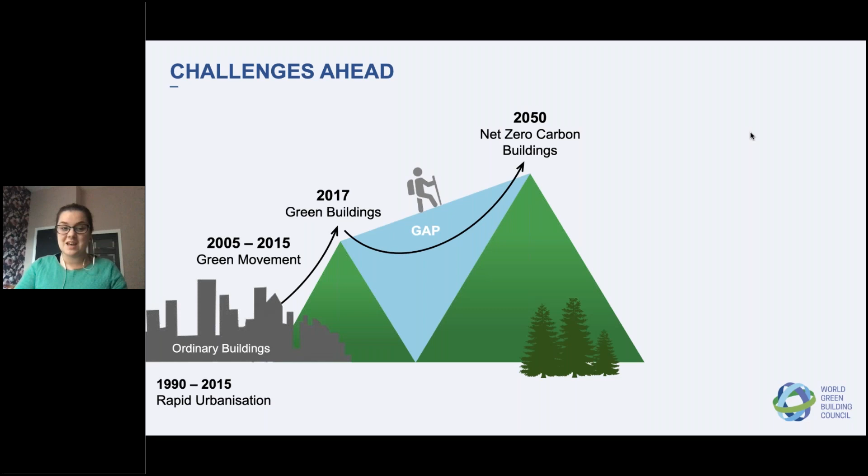But the reality is that in order to achieve our climate reduction targets, we must reach net zero carbon buildings by 2050. The gap between the definitions of green buildings that are a little bit better than typical buildings meeting code, and the very high performance net zero carbon buildings we're talking about, is very large. So it's important that we understand how this can be achieved, and that we can leap over that gap from ordinary buildings into net zero carbon buildings.

And looking ahead, we need to be thinking about creating regenerative and resilient cities and healthy communities that support a responsible and healthy way of life and well-being.

The Advancing Net Zero project was created by the World Green Building Council as a global campaign to accelerate the uptake of net zero carbon buildings to 100% by 2050. We want to do that by increasing awareness and education of the urgency and achievability of net zero carbon buildings, achieving alignment and commonality between the different approaches and certification schemes that green building councils have around the world, and finally expediting uptake in global markets by sharing market leadership examples through events and forums such as the one we're having here today.

We at World Green Building Council have set a whole life carbon vision that says by 2050, buildings need to be addressing both net zero operational carbon and also the embodied carbon associated with the materials and construction that go into their building and renovation over the future, and that by 2050 both of those impacts need to be zero.

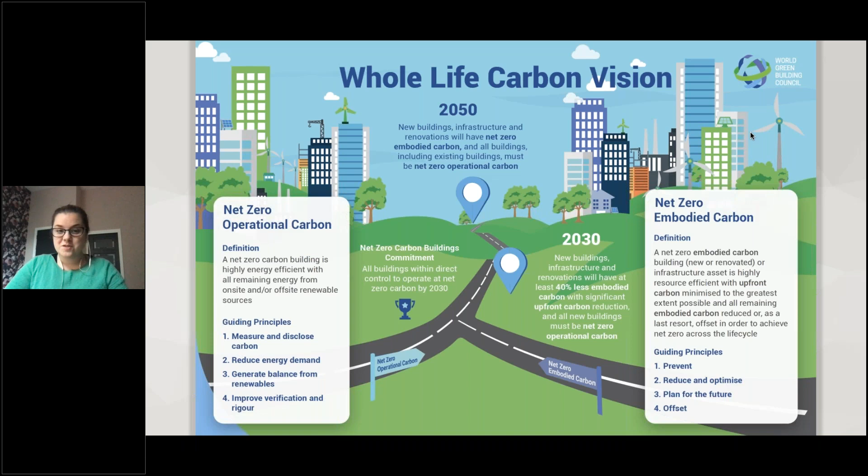Through this vision, we've created a framework to help us get there that sets a definition and guiding principles for both net zero operational carbon and achieving net zero embodied carbon, and we have some interim targets for 2030 to help us accelerate that transition.

But the main thing we need to be communicating is that when we talk about net zero carbon buildings, we first of all mean the way they operate, the way they perform. That means they need to be highly energy efficient, with all of their energy demand met by 100% renewable energy. And as we transition into a whole life perspective, those buildings also need to be very considerate of where the materials are coming from, and the carbon impacts of those materials from production all the way through the building's life cycle.

To run through some definitions on what we mean by net zero: first we take the baseline of the building, the energy consumption expected to be used by the building, and therefore how many carbon emissions it will be responsible for during its operation based on how that energy is generated.

Through energy efficiency measures, we can reduce the energy demand, and that building will be more energy efficient than if it was built to local code requirements - for example, bringing in measures like improved glazing, or maximizing the use of natural ventilation and lighting to reduce the power needs of the building.

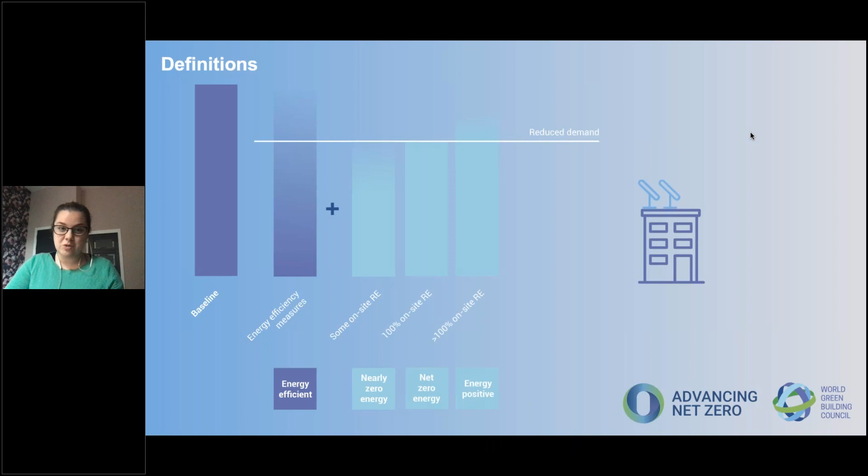That might mean the building is energy efficient, but in order to bring it into the net zero carbon categories, it then needs to meet its energy demand with renewable energy. If you're able to produce some renewable energy on site to meet nearly all of that reduced demand, that building could be nearly net zero energy or net zero ready - prepared for a grid that is decarbonized in future. Where a building has met all of its needs with renewable energy on site, that's called net zero energy.

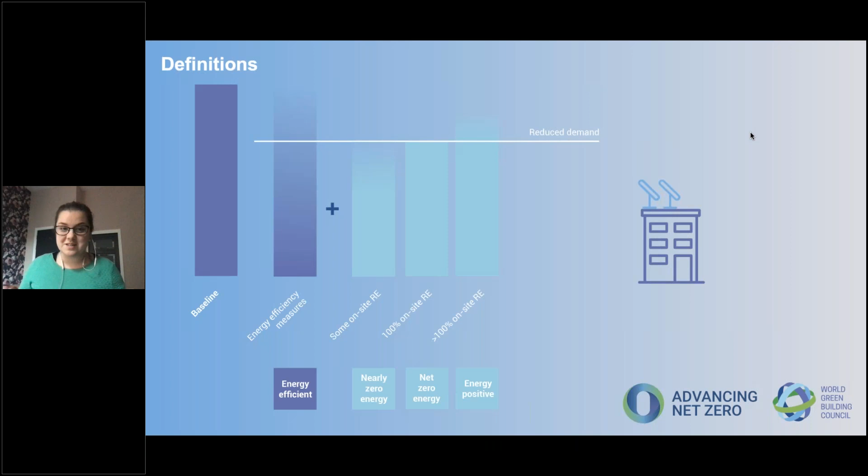And where it generates more energy than it needs to operate, and therefore shares that energy back to the grid, or even with buildings around it, that's an energy positive building.

But for us, we feel that in order to achieve our net zero targets, we need to be focusing on net zero carbon, because not every building will be able to meet its energy demand on site with solar panels on its building. So it's important for us to consider where renewable energy can be generated off-site and then bought and brought into the building, so outside of the building's boundary itself.

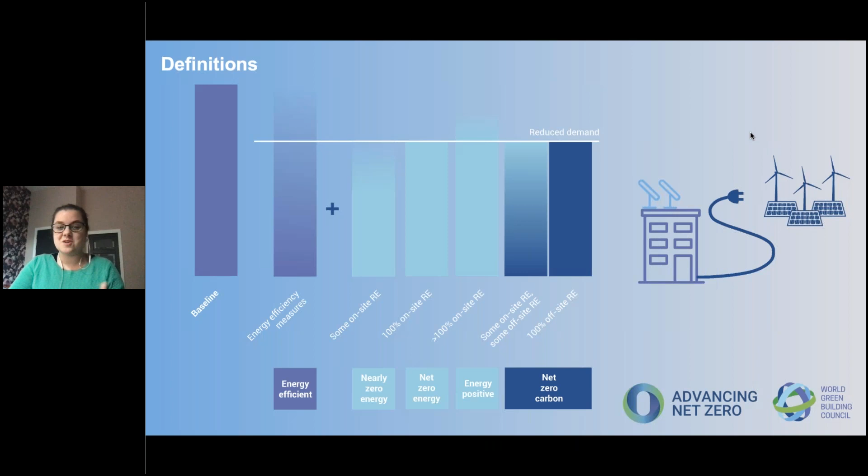And where that's not possible, we also recognize the role of carbon offsets in order to balance the carbon necessary to operate that building. And so that's what we mean by net zero carbon buildings.

Our green building councils in our network around the world have been busy creating tools and resources and programs to help promote how to achieve net zero within their particular markets. And there's lots of different names and terminologies based on how a market is responding to the challenges of net zero, and whether they might be including other impact areas within that program, whether they might have different restrictions on the way that you can procure renewable energy, for example, but very much based on the local context and what is appropriate.

They may all be called different things, but they all follow the framework that I set out earlier with those key principles. And so it means that there is alignment within what they mean by net zero. And in this case, zero really does mean zero.

In terms of the value proposition for net zero carbon buildings, whether you are a policymaker, an investor, an owner-occupier, a developer, or a tenant, there will be a compelling reason for you to take on and embrace net zero buildings as part of your portfolio.

Whether that's sending positive signals to the market or back to policymakers about the readiness to embrace net zero buildings, whether you're ensuring that your assets are fit for the future and they are Paris proof, so they are prepared and future proofed against future impacts of climate change, and whether it means that you're creating enhanced internal environments for your occupants, or whether it's ensuring that you're taking opportunities through your core business activities to demonstrate climate leadership.

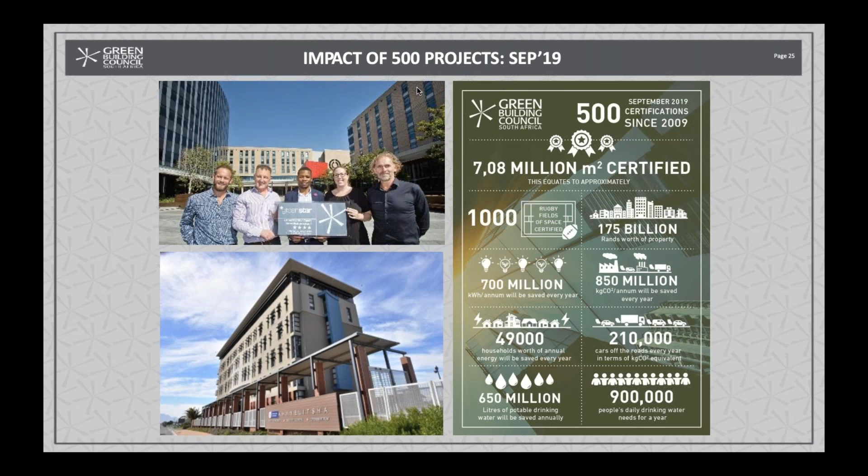So we've certified over 540 buildings actually to date. This was our 500 milestone that we reached at last year's convention, demonstrating the tangible impact that green buildings have on either energy or water savings. Thanks. Next slide.

Our certifications are informed by a whole range of different tools, primarily looking at either new build, when you're looking at the intention and the design of a building, and also looking at existing buildings. But obviously, what's really exciting and what has really captivated the market of late is net zero. And the GBCSA, as we mentioned, we came up with our own certification tool, but I'm also going to touch on EDGE, which we use to certify residential developments in South Africa. EDGE has been developed by the IFC, which also now, since 2020, has a zero carbon option. Thanks. Next slide.

So, our net zero scheme. I thought I'd share some of the interesting things that potentially make it slightly different.

We can apply it to carbon, and we've actually extended it also to water, waste, and ecology. I think we're one of the only GBCs that has extended it all the way to ecology. And we also look at both a modeled or a measured option, and this is quite interesting. A lot of net zero schemes only look at measured options for existing buildings, so that's when you would focus on consumption data, for example, over 12 months.

We felt that it was important because of our market and our context to offer options to projects along every stage within a building's life cycle to consider net zero ideas. We wouldn't want buildings to get to the stage where they are existing and then they retrospectively need to retrofit because net zero design principles were not thought of at the design stage. You can pursue net zero on its own, for example, if your project wants to go off the grid, or if you are pursuing it in parallel with another certification.

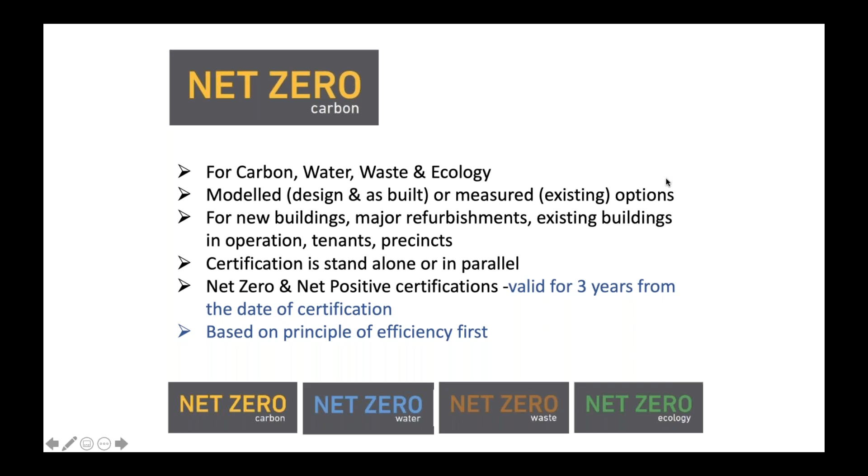I think you've got to skip. Okay, and the next slide, please.

Okay, great. And another interesting thing about our net zero carbon and all of our net zero ratings is that we introduced different levels, and this recognizes the different stages within a product's carbon life cycle. So the first stage, level 1, if you don't mind pressing a few times because it's going to come up in different little stages. Yeah. Level 1 looks at the base building. So this really just looks at non-tenant energy uses, so all the fixed services within the buildings. Level 2 then looks at your base building plus occupant operations. So this would include the operational energy used by the building occupants, things like electrical appliances, tenant lighting, the plug loads, and, for example, process energy.

Currently, we are only able to certify at level 1 and level 2, because if you look at levels 3, 4, and 5, our current market conditions in South Africa are just that we don't have enough available data at scale in order to warrant levels 3, 4, and 5. So just to keep that in mind, we are open to whichever point emerges where we are able to certify levels 3, 4, and 5, and we will then do so. Thank you. Next slide, please.

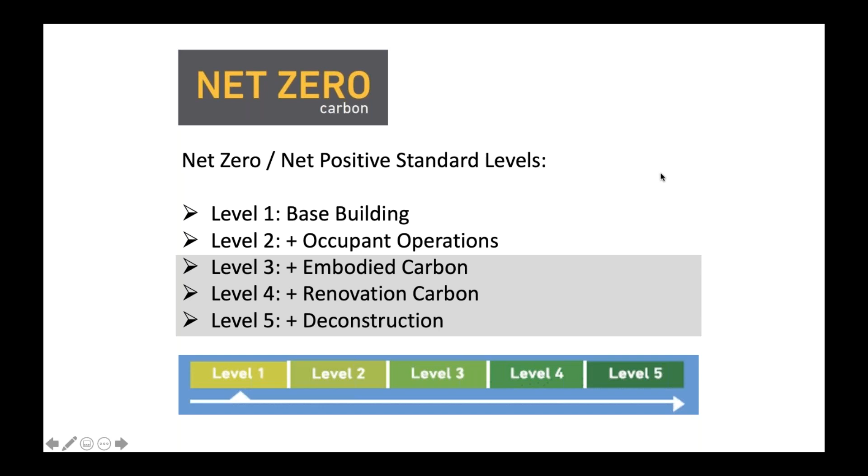Okay, so here I thought that I could showcase some of our certifications to date. Vere mentioned in the beginning that we want examples of net zero, and yes, we do have certified examples within South Africa and therefore on the African continent. We've got 16 net zero and net positive certifications through the GBCSA. 8 of those relate to carbon, so half, and out of those 8 we've got 7, the majority obviously being net zero, and we also have 1 net positive rating.

Our definition of net positive in the GBCSA is that your supply's got to be 5% in excess of your demand. And we also have net positive ratings for waste and ecology. You can see the grey within the bar graph over there. Next slide, please.

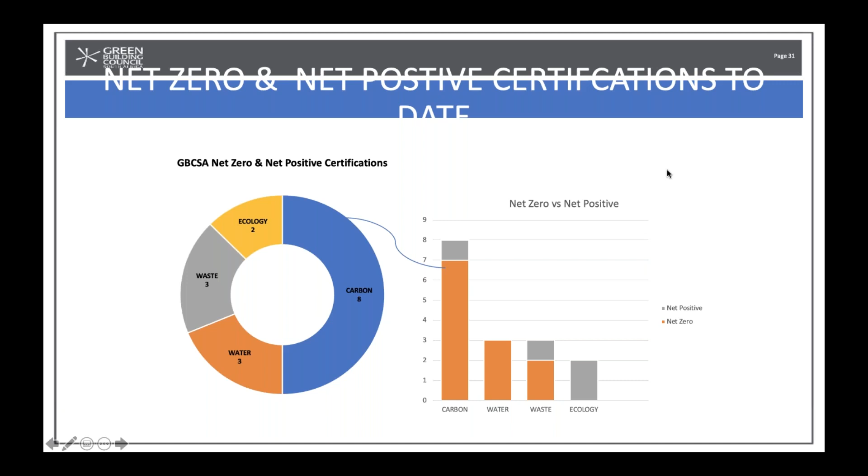Yeah, and then digging a bit more down, we've got a nice balance between level 1 and level 2, but the majority of our net zero carbon certifications are modeled as opposed to measured, and this speaks to our prediction that we needed to have the modeled option for our market because it would be considered useful and an appropriate tool for where our market is at in dealing with net zero. Thanks. Next slide, please.

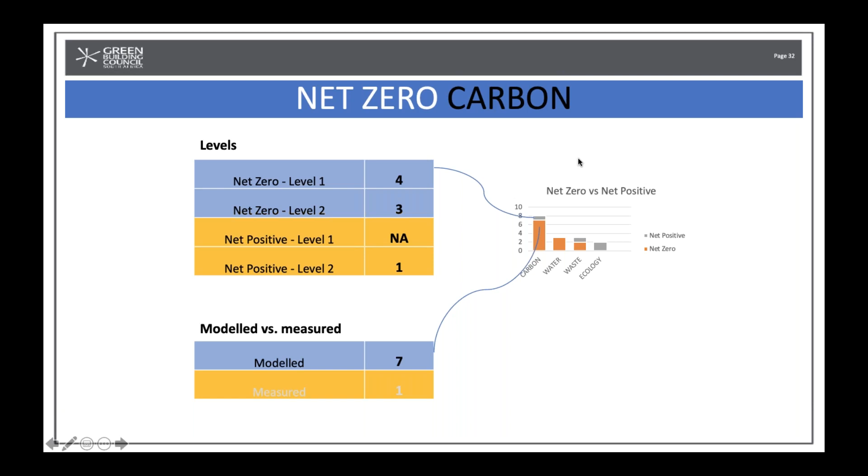Okay, so we've got some examples here. We've got 78 Corlett Drive, which is an office block in Johannesburg. All of our net zero case studies are on our website, and I've kept the link in here so that when we share it later, you can also go and read the case studies to get a bit more detail, understand which teams were involved in these projects. But 78 Corlett Drive was a level 1 net zero carbon, and it also got a 6-star Green Star rating.

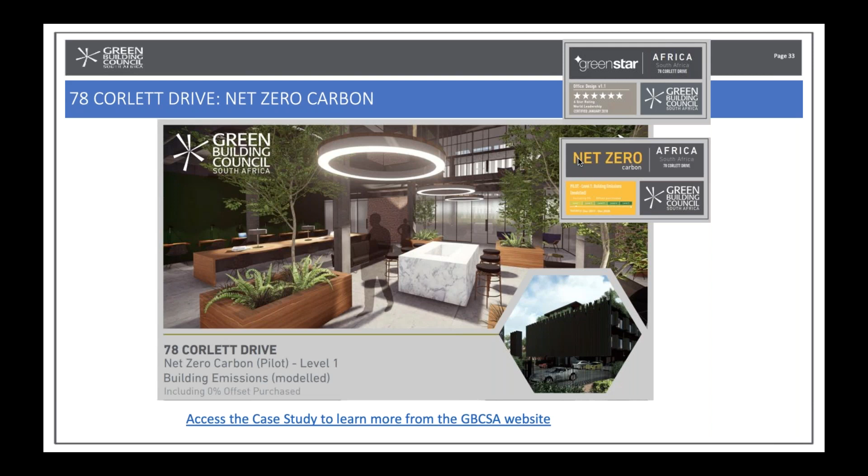And the key thing, or their path to net zero, was they really used passive good building design as their starting point. They made sure that they looked at each orientation and made sure that it had the appropriate bioclimatic response to either the north or the south or the east and the west. Next slide, please. After achieving that kind of good passive design within the envelope, they then looked at efficiencies within their active systems, such as their lighting and their HVAC. And then lastly, there is a PV installation on the roof, which helps the project achieve net zero. Next slide, please.

Here we've got an example of an industrial building. So this is Greenfield Industrial Park. And industrial buildings have got great potential for net zero, obviously because of their large roof space, which can be fitted out with PV. And when you compare that to the kind of minimal energy demand that most lightweight industrial requires, it's an easy win for industrial buildings to go for net zero.

And what we ideally want to be doing is making sure that all of our industrial buildings are kitted out with PV on the roof, so that the excess could actually then be exported to buildings or to the grid that don't have the appropriate space to generate enough electricity. Next slide, please.

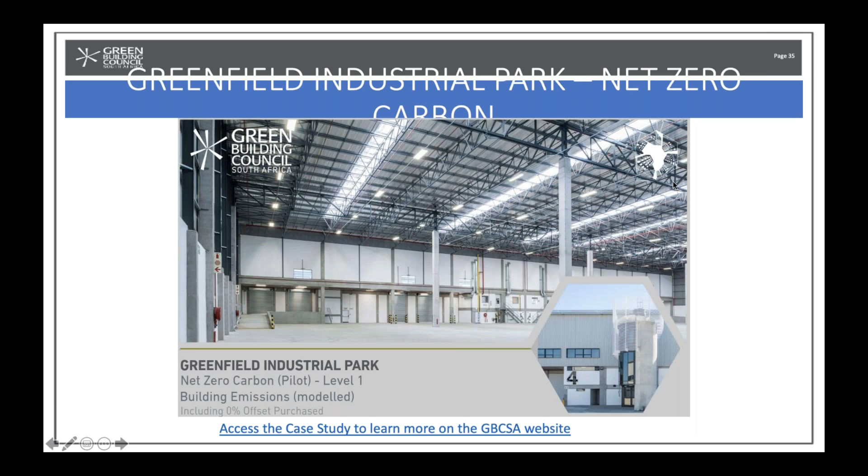And here we've got 2 Dams Sustainable, which is a sustainable trout farm. It's totally off the grid, primarily through PV and also through a bit of microhydro. And then just in terms of the carbon emissions associated with the gas for cooking, offsets were used to achieve carbon neutrality. So we have other examples of offices. We also have some residential examples. There are other industrial projects that have also qualified. So please go and have a look at our website so that you can see the diversity of projects that have achieved net zero.

Obviously, we are really trying to move to the point where we look at much taller buildings, but due to the technical limitations and the issues associated with green procurement in South Africa, that's still going to be a while before that happens. Next slide, please.

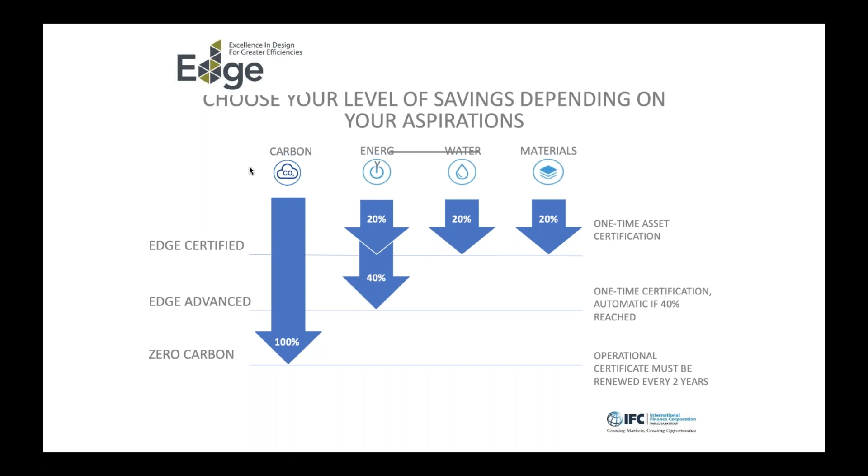So just a quick note on EDGE. EDGE, as I've said, obviously looks at our residential developments within South Africa. And once you have achieved EDGE Advanced, which demonstrates that your energy savings are in excess of 40%, you can then pursue a zero carbon rating. The difference between EDGE and the GBCSA's net zero carbon rating is that this is only operationally focused. So it would be like our measured option, looking at operational consumption data, and similarly it needs to be renewed on a regular basis, because obviously we're talking about ongoing and continuous development. Thank you. Next picture.

I thought it would be useful to touch on some of our key drivers for net zero in South Africa, just to share some of the broader policy enablers that are supporting this movement. We obviously have some supply issues from our main utility, and so there you get a very voluntary market response to wanting to go green or to be net zero, so that you can ensure the continuity of your business operations. But we do have other drivers.

Next slide, please. The first one this year that was really interesting and hopeful was our national building regulations, called SANS 10400 XA. They were first released in 2011, and they stipulate legislation that governs how energy efficient buildings need to be.

In 2020, after a lot of waiting from industry, the update was released for public comment, and it's far more user friendly, and it has drastically reduced targets, which will drive energy efficiency in the right way. So that's been a great step for the industry going forward, and that's really highlighting the role of legislation in being a driver for this movement.

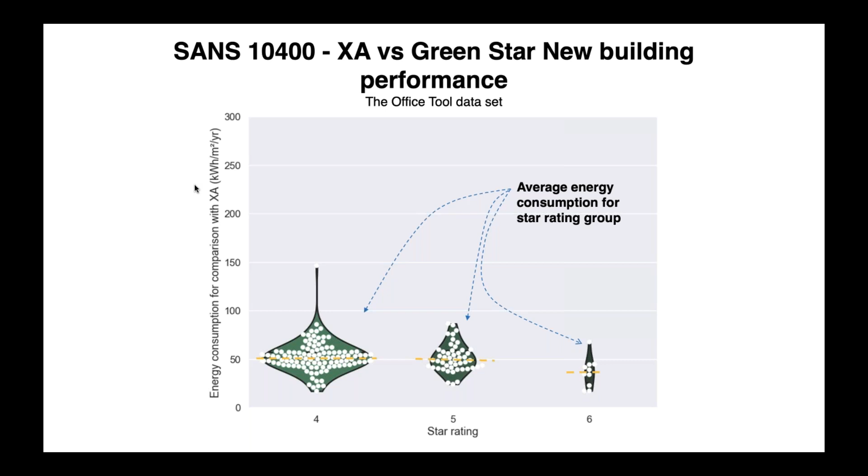We thought it would be interesting when the update came out to crunch our certification data, to look at the numbers, to understand where Green Star buildings from our office data set sit in comparison to the targets. You can just click on, and I'll talk through this graph. There's quite a lot of data, and due to time I won't be able to go through all of it, but what it proved is that the majority of the Green Star buildings are within the target, so the averages are within the targets, but if you look at the range of the green plot graphs, just click again, sorry,

you can see that the red lines represent the legislation. Those are the limits that you've got to fall within. So there's a vast majority of projects that are well within the limits, but there are projects at a 4-star baseline that would need some form of market transformation to meet some of the limits depending on their location. So I think that was also interesting.

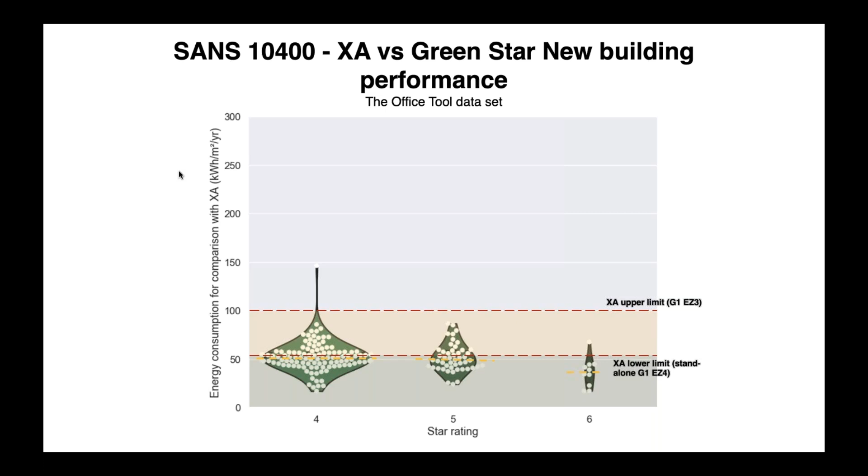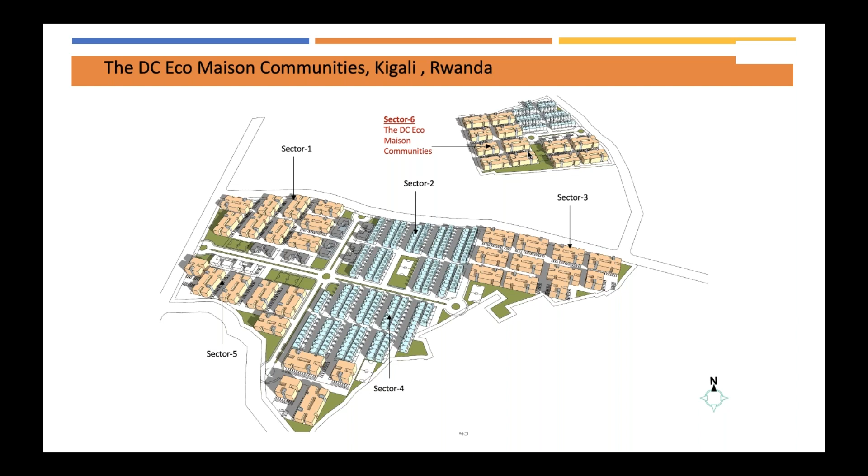Okay, so the DC Eco Maison Communities is one. This particular place is part of a bigger master plan, which consists of about 14 hectares. But the one that we targeted was this particular zone here, which is called DC Eco Maison. The community is about 3.4 hectares. It has about 300 units of houses. For the 3 bedrooms, we have 80 square meters built-up area and 72 square meters land area. So this is not social housing, it's affordable housing. This house will be part of the Africa Development Bank Fund houses.

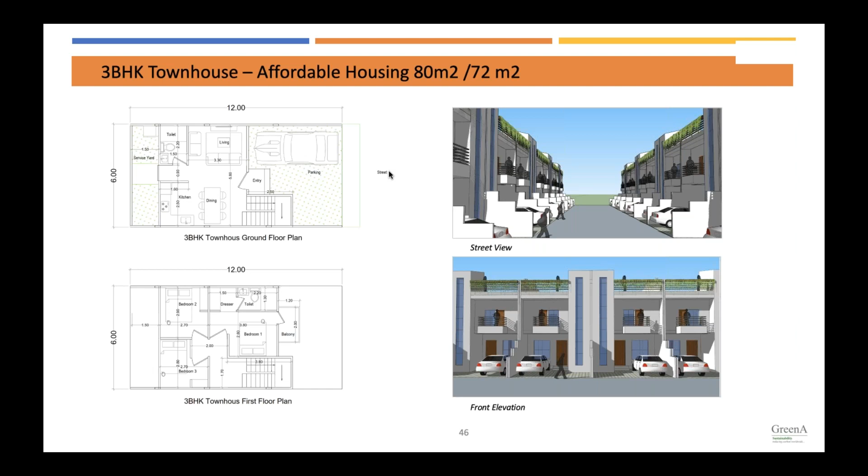So how we do it is like all the approaches before, we look into the design. But this design, the way we look at it is a little bit different because it's affordable. So it's what we call townhouses. So the built area is actually just this much. However, we built it up so we have a better amount of usable space.

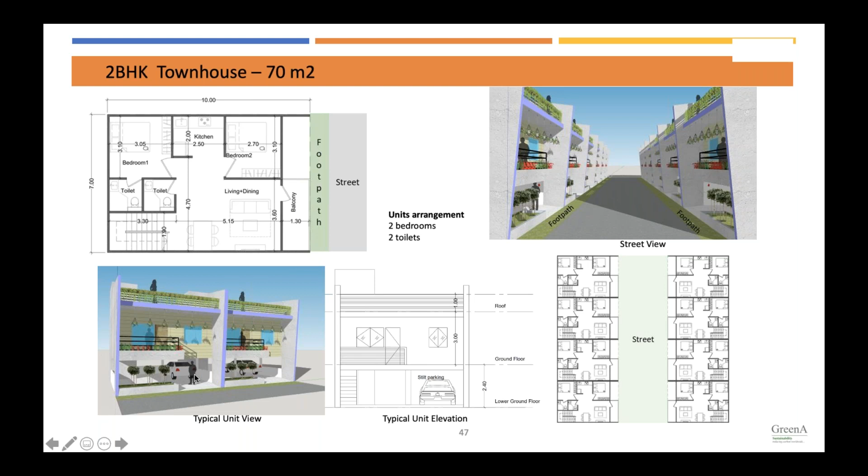As you can see from this segment, we actually use a lot of airflow ventilation passively running through the design. The reason why we did this is partly to cater against any flood resilience structure and also use the space as a car park, so it's sheltered when you actually take off or come on or come off. We also have this balcony and a roof terrace where we put in the solar panels towards the end.

So this particular design is actually row houses, or some of you call it townhouses. The ventilation cooling of the thermal mass is actually taken care of by the materials that we used and all the equipment, which I will show later in my slide.

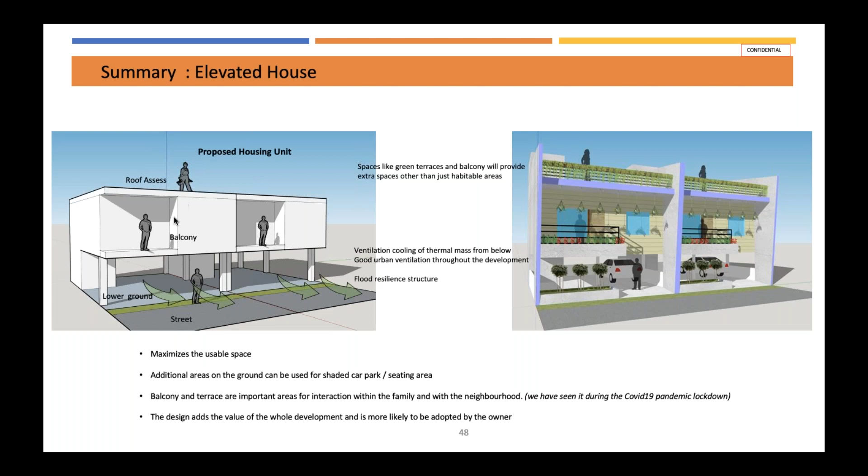So we take a look at two things. Dominantly, we took a look at the climate responsive design. For the concrete, we use foamcrete, which has a very good U value. Besides taking care of the orientation, which we take for granted that it's already been designed in, so we skip that part and go straight into the thermal mass design. Of course, the fenestration - being affordable housing, we do not have a lot of glass and windows.

So we limit it to the bedrooms as well as the living rooms. We do have this ventilation below where air flows, so it's actually rather soothing for you to be on the top here. We also look into the roof space, and since we are part of K-CEP's Million Cool Roofs Challenge in Rwanda, we have developed our own paint system with very high SRI and thermal emissivity coating that assists a lot in the insulation of the roof, which is one of the hottest areas. And we offset it with the PV panel. We also bring in biophilic design for the sky garden as well as terraces to cool down the surfaces.

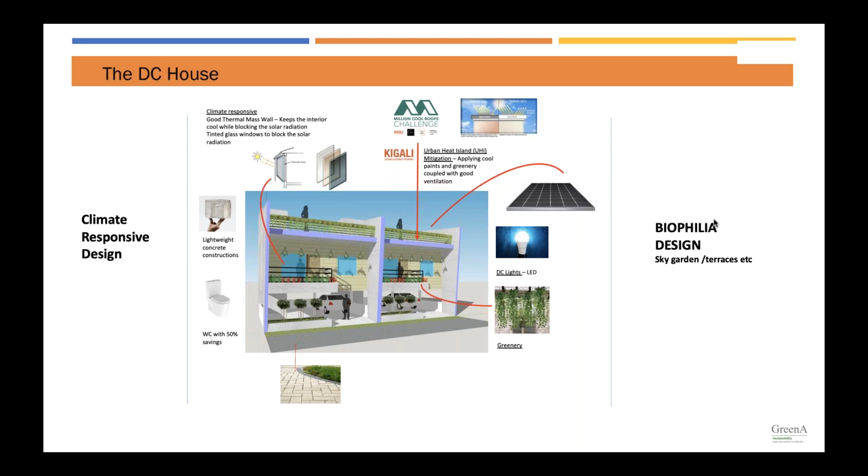So this is going into a little bit of detail. As I mentioned, we take it that it's already designed facing northeast and southwest - that's logical. However, the foamcrete has a very good U value of 1.5 watts per meter square because it doesn't use any concrete aggregates. The tinted glass we use has an SC value of 0.5. And also for the roof, we use the same material, foamcrete, along with a thermal emissivity of 0.9 as well as SRI of 79. We also use the radiation to counter the radiation along the perimeters and outside, using SRI of 79 in terms of material system and finishes.

What we did extra was actually go into the active system, which is one of the hardest. This particular building - why it's called a DC house - is because we only plug in onto DC, so there is no transmission loss from AC to DC. So we look at all the LED lights and the ceiling fans. The ceiling fans are actually incorporated together with the lights and powered by the DC, which is from the solar panel on top. We also use eco fridges, which we call DC fridges, and TVs, to lower down the load that is coming into the houses.

Thermal comfort is one of our biggest driving forces, because most of the people who actually live in this house have to be comfortable with everything shut also - which means if you have your fenestration shut, your doors shut, and everything is shut, will you actually reach the thermal comfort you wanted? So we have the ceiling fan, and of course we have to do a verification study to make sure that thermal comfort is not compromised in the path of going for zero. That is actually very important. As I mentioned, the fan is powered by DC together with the light, and that helps a lot in getting the PMV value of thermal comfort to at least slightly cool, or not cool.

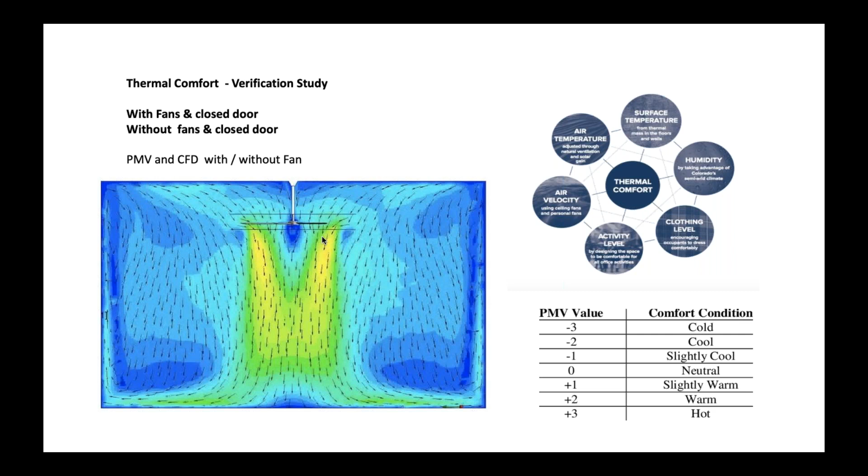So this is actually how the pathway works. We have to compute all the energy, all the hours, and get out the total consumption. The DC to AC equipment gives us about 25% lower load from inversion losses. That helps a lot with humidity and high temperature too, because all those inversion losses actually emit heat within the space. Inversion loss can also be part of the battery system, anything that has a battery pack system, like a computer or any electronic. So we fully advocate using DC devices for these houses.

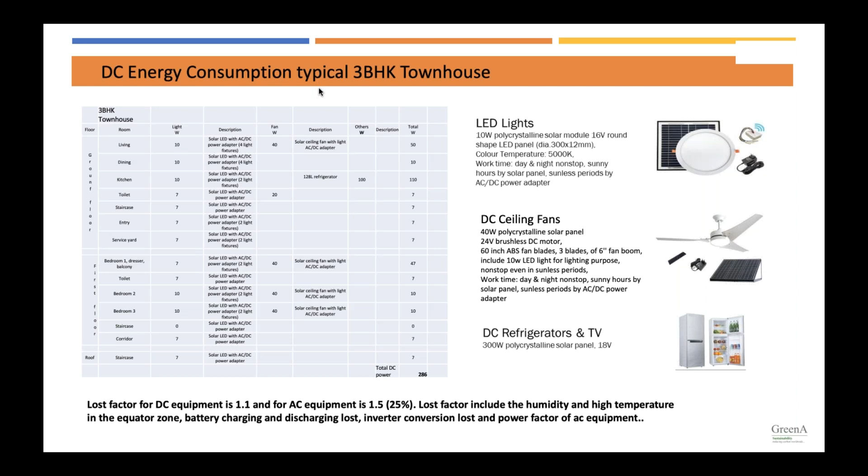So it's pretty simple - it's actually demand versus the panel that you offset. We're close to 1533 kilowatt hours per year. Again, for us, we only use measured data - we do not buy certificates, neither do we model. So we use prescriptive methods because it's a house, it's kind of simple, and any offset or verification will need to be done once upon operation.

So for this, we use bifacial panels. Bifacial is about 410 watt peak, and we need only about 2 bifacial panels, costing about $2,000 versus the current electricity rate, so it's quite easy for everyone to follow. It takes less than 3 years to pay off your bills, and the rest is actually free energy coming in.

As you can see for yourself, we covered literally the whole top space in solar panels. We use the same method as what I mentioned just now. However, this is a bit harder because it's a high rise, and I think this building you can relate to because there's a lot of buildings which look similar like this.

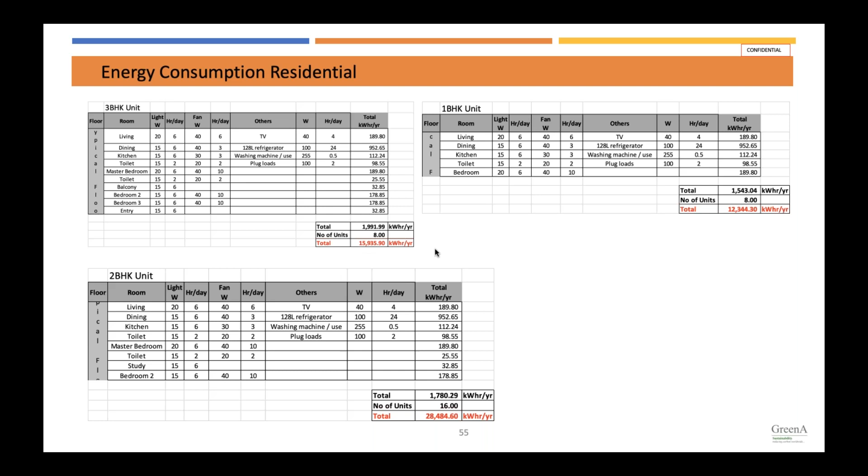So again, we use the same computation as what we did. We take into account that all the envelopes have already been optimized, as well as the thermal emissivity, the roof as well. We compute out the energy for the 2 bedrooms, the 1 bedroom, as well as the 3 bedrooms, and get the total amount of consumption. Out of that total amount of consumption, we actually use it to offset with the PV panels.

So again, our case is always measured. We cannot look into a building until it's actually measured through bills and in operation for a minimum of 6 months before we can define it as zero energy. Once again, we do not buy any REC or carbon offset credits in this project.

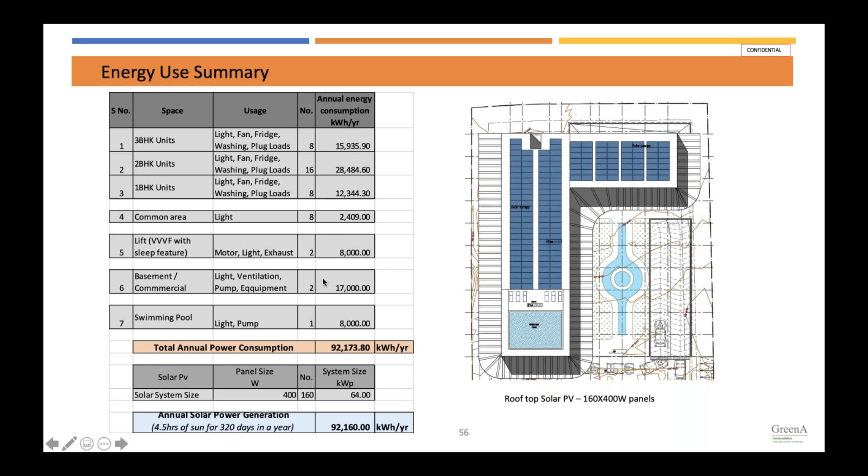So those are the 2 projects I would like to share. I'd like to give you some tips, a summary of how to actually try for yourself zero energy. In summary, it's just a simple ABC of zero energy metrics, so I guess no one will get lost. As Victoria said, there's no exactly wrong or right way to start in this dynamic path to zero.

Then again, you start with the design, you have the shell, and it takes care of everything in the envelope, as architects and engineers all come together. And the energy will come in - so energy, we have not just optimization, we have hybrid coolings as well, and we have plug loads.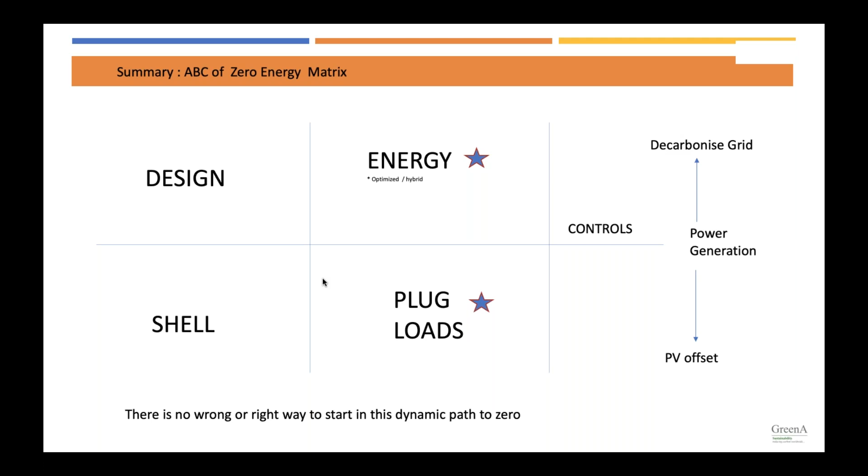And of course, if you're in a space where there's an SEZ or the infrastructure is modeled in a way, then you could just easily decarbonize the whole grid, and you would actually have a zero community with it. So that's about it, I think.

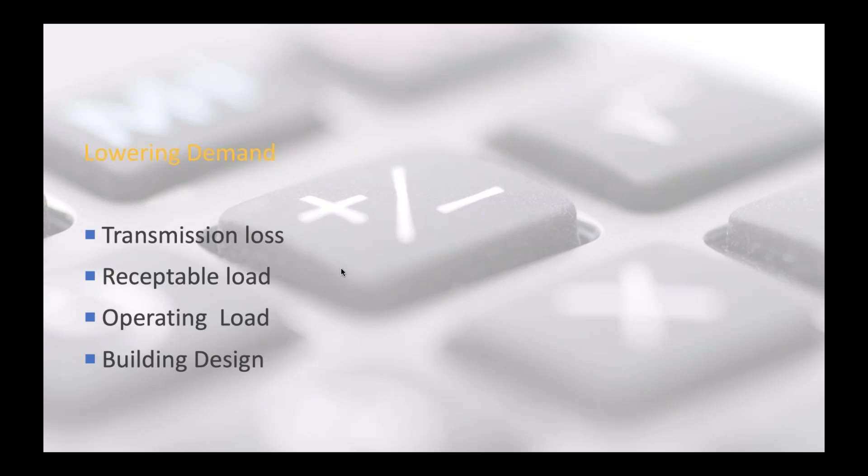So simply put, to lower the demand to offset with renewable energy is to lower the whole demand and bring in on and off-site to achieve zero. If you can't do that, at least you come close to super low energy or near zero, and you can do positive energy, simply produce more than you demand. There is a global website called Geo Map that will be able to show you the global amount of net zero buildings in the world. It's administered by IEA. Yes, I think that's my end of presentation there.